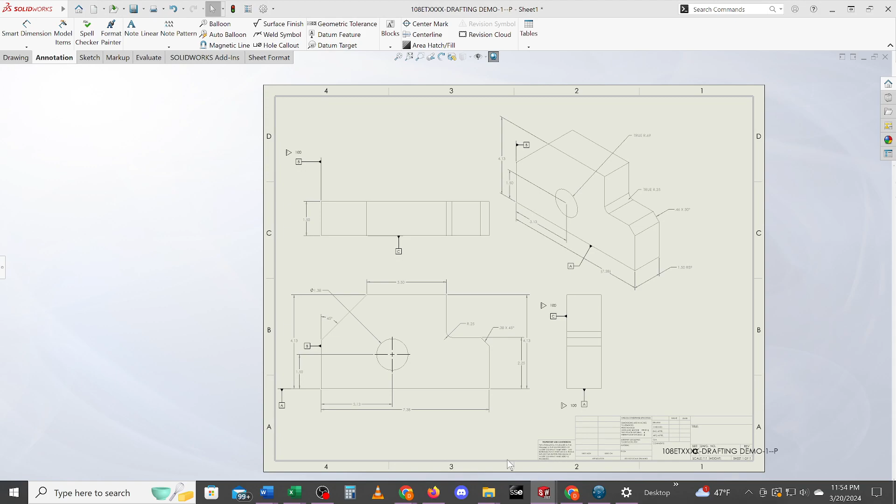I'm going to attempt to create this drawing, but before we can create the drawing, we have to create this part. So we're going to try and make this part from scratch.

Take a look at the sketch. I'm going to hit fit all in and put this back to that front view.

I'm going to try and duplicate that as best I can. I'm going to do this without a grid. You're going to see why here, but I'm going to have a bunch of weird numbers. Just going to make this part, show you how easy it is to adjust. We'll see how it goes.

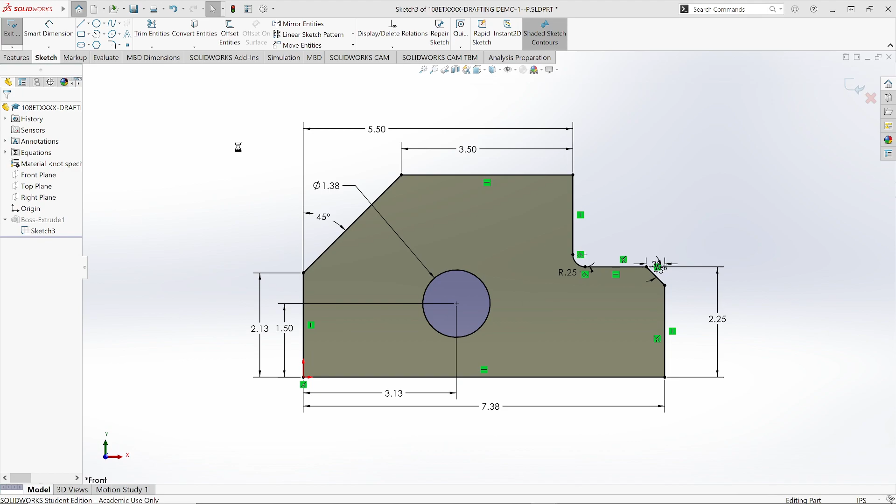So I'm going to try and create a new part by hitting this part button. And I'm going to go into Sketch and select Sketch on the top left, and we'll go into the front view.

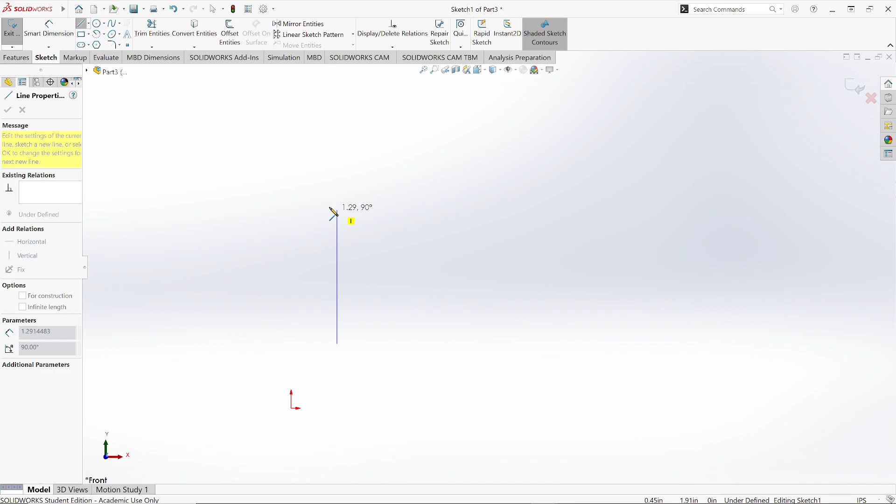I'm just going to kind of zoom up a little bit and just randomly pick a spot using a line. I'll come from here. I want to make sure it says 90 degrees. I know it was about 7 inches long, so let me zoom down enough.

If that's about how long it was, and we want to be at 180, that's about how long the bottom line was. So if you just create the bottom line, that can kind of help you figure things out.

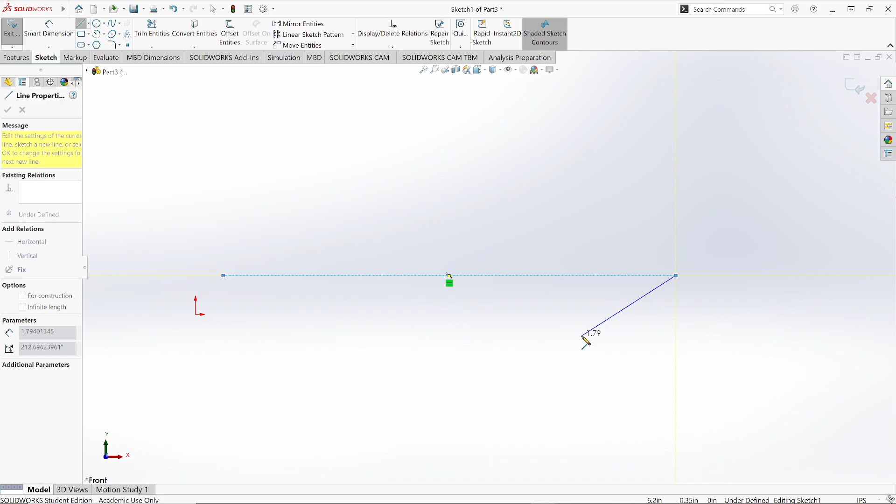And I just kind of came up to some random spaces. Again, I'm just using... I forgot to use my control button. When I move that, I'm just going to re-hit this front button there.

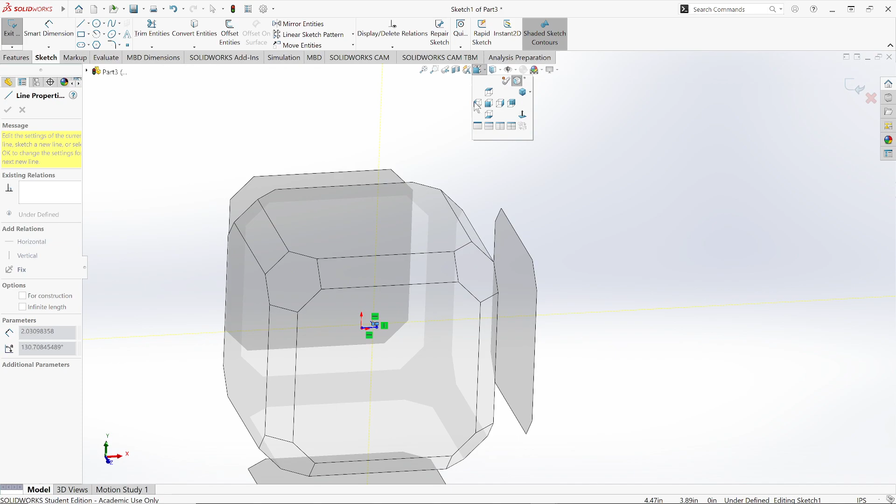And then, let's see, we went up. Oh, shoot. I must have clicked on that by accident. We'll go back. Let's go ahead and start on this side.

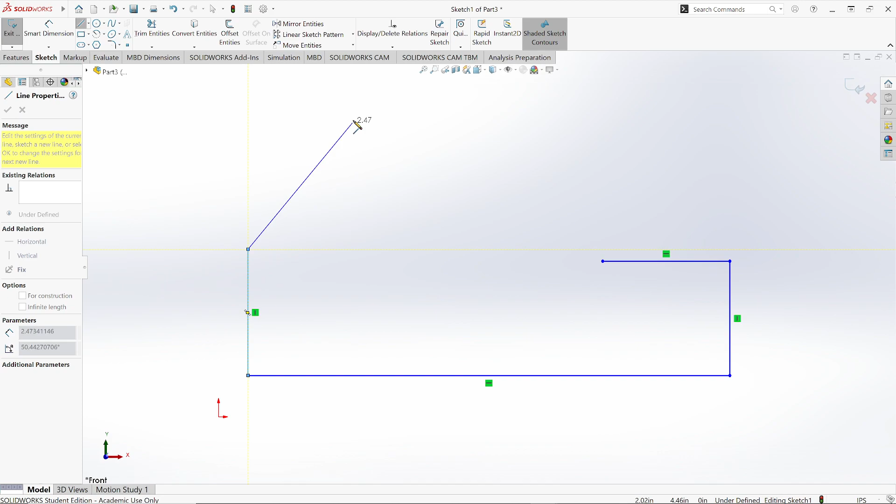Again, I'm just making a general shape. It just kind of went up something like this, over something. I'm going to use that to help me line it up. Drop it down so it's horizontal. Drop it over here.

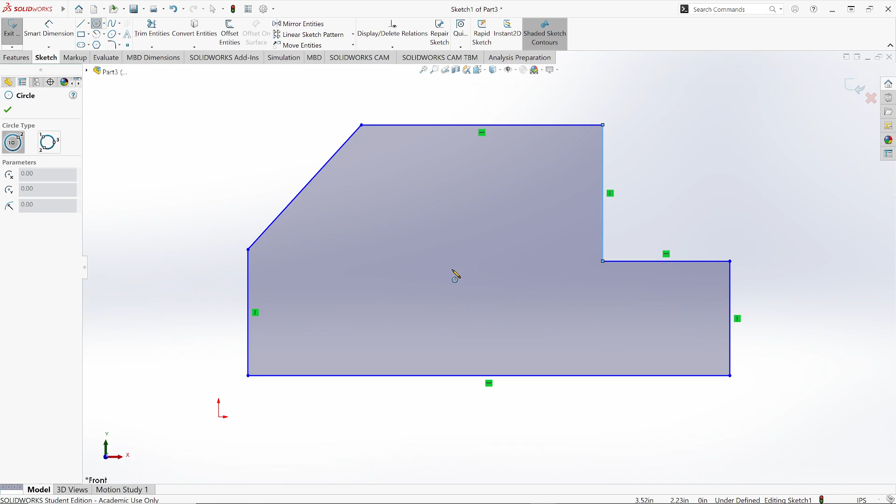Okay, and I'm going to go ahead and create a hole in the center. So I'll just use this circle feature. I don't know, something like that, I think.

Alright, so that's sketching a shape. I think I'll do a separate video on the dimensions.